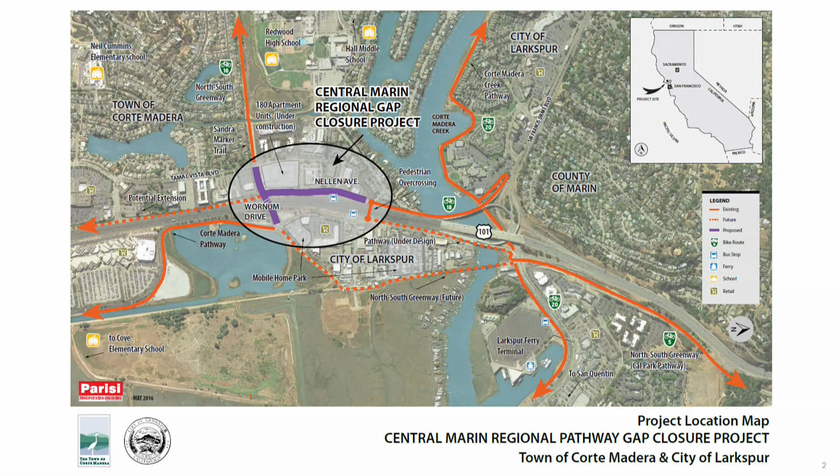Here, this is my mouse. All right. We gotta get this straightened out. We go through this every meeting. It's like this is great.

As RJ mentioned, we are under the PAED, which is Project Approval and Environmental Documentation stage. And under that, we have several subtasks that we're going to be completing. We have a field review, including topographical surveying and mapping, really understanding the area. Data collection, including counts and other elements. We'll be mapping the area. We'll be conducting a robust traffic analysis because we are going to be looking at potentially opening up Nellen to access off of Fifer. We'll be looking at different alternatives, and we're going to chat about that tonight because there's different ways to provide a bikeway or a pathway along Nellen Avenue.

Of course, there'll be some really robust outreach, not just with this group, but also stakeholders that live and reside and have business along the corridor. We'll be refining the design to get to an improved concept. In concert with all that work, we do need to complete some environmental work to be in compliance with the California Environmental Quality Act. The biggest issues we believe will be looking at transportation impacts, particularly if part of Nellen is open to inbound access off of Fifer. There are some trees along Nellen that we could impact, that we'll take a look at, and there's some cultural resources as well.

Well, everyone's welcome to pizza. There's enough here for everybody, so don't be shy. Thank you, Kirby. The smell will get to you, man. You got it. Like otherwise, you're just gonna drool.

And there's a few feet between the fence and the curb. And then the street itself has 8-foot parking areas on both sides and 10-foot travel lanes. So the street is thin, but it is a two-way street. And then there's also a narrow sidewalk on the west side. So something has to give if we're going to put a pathway in here or a bikeway. And we'll show you some of the options that we're thinking about.

To the left here, that's called a cross-section, and that's exactly how it looks today. You can see the 45-foot right-of-way, the roadway, the Caltrans right-of-way to the east to the left, and then the right-of-way line to the west, and the 4.5-foot sidewalk. As part of the grant application, this option A was submitted. It's not in stone, but this is what was part of the grant application. So we're showing that as option A tonight.

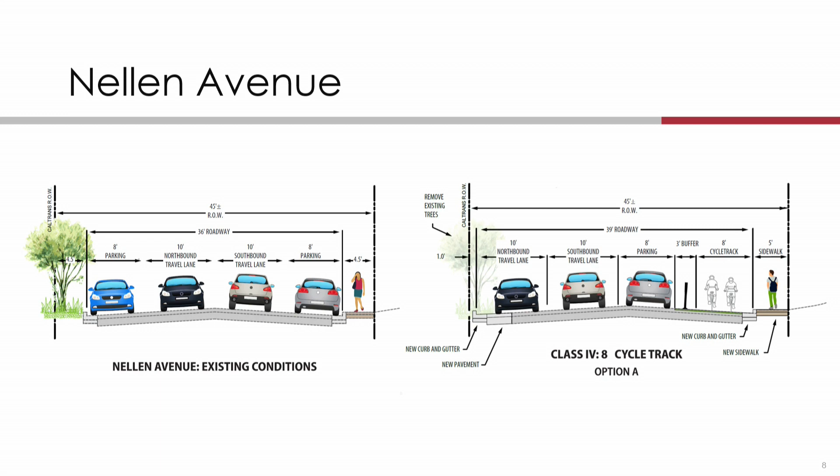So that was what was included in the grant application. We've sketched up a couple additional options that probably should be considered, and folks will probably be very interested in the pros and cons of those as well. So the left side is exactly what I just showed you, existing conditions on top, and on the bottom was that option A, which is the cycle track.

We sketched up a potential option B, which instead of a cycle track would be a Class 1 pathway, which would be a multi-use pathway for pedestrians and cyclists. Keep in mind that Wornum is a multi-use pathway. And the crossing over the Corte Madera Creek is a skinny multi-use pathway. So this is what we're showing here.

This option, interestingly enough, the one that we're showing as option B, could retain the curb against the Caltrans side, so that wouldn't need to be moved under this schematic. You can see there's a tree still there. And then provide two 10-foot traffic lanes, 8-foot parking lane, and then a Class 1 pathway.

And then we're also showing an option C, which also would have two-way traffic, parking just on the west side, but would move the curb on the Caltrans side or the east side to provide a more gracious pathway with better buffer and so on and so forth, and not have to rely on the west side properties to use for a shoulder. These are just some of the ideas.

Parking could flip-flop to the other side. We may hear that folks want to perhaps look at a one-way for traffic, just in one direction only, especially if access is opened at Fifer, perhaps just a southbound Nellen Avenue. So all this will be considered. We'd love to hear some input tonight. These are just some starting points.

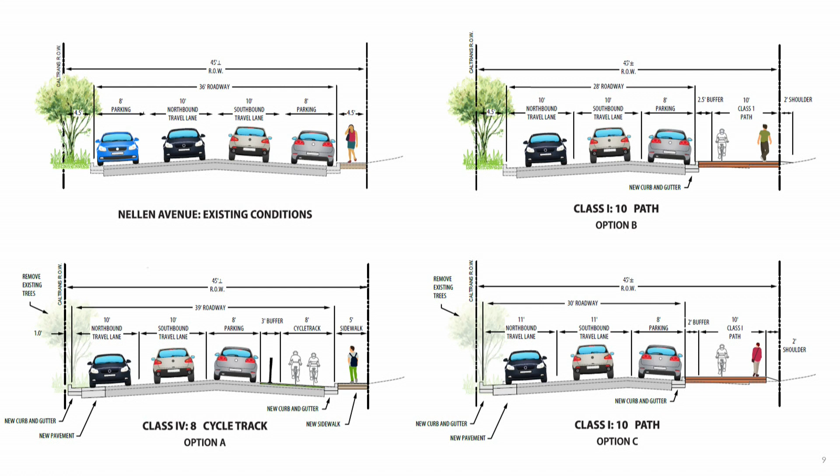I mentioned the idea of providing vehicular access to Nellen. I wasn't here in 1987. I think, who was? Who remembers this?

Yeah, okay. So, before Wornum, that alignment used to be the train, and you can see how the roads were configured with Nellen sweeping underneath the north side undercrossing there under 101, a few decades ago. And Nellen used to be a two-way access street. That's how you got to the other side of the highway.

So what we're looking at under this study would be potentially opening up Nellen just to traffic going eastbound on Fifer and then turning right onto Nellen. Okay, does that make sense? But not traffic coming the other direction getting onto Nellen, because the median would still stay there.

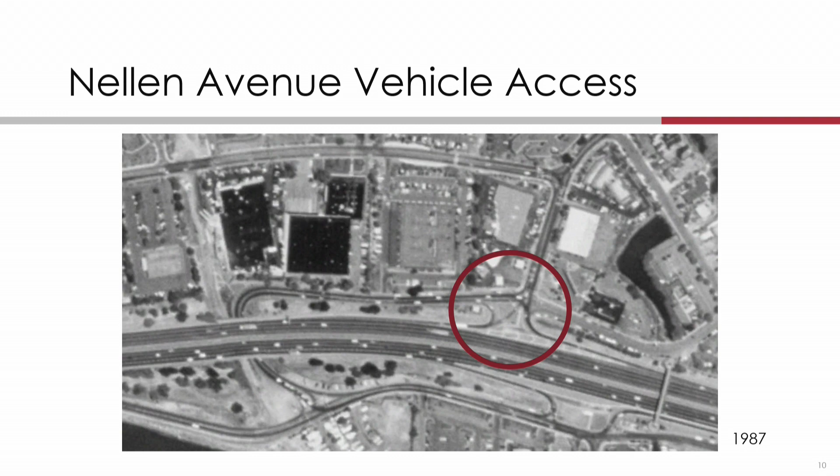And some of the things we're going to be looking at there is, well, gee, okay, if you do that, could that help Tamal Vista? Because we know that the left turns from Tamal Vista onto Wornum are huge at times, causing lots of delay. And we're going to model with traffic volumes and traffic modeling and simulations to figure out how much time would that save, how much congestion would that reduce, and what could be some of the other effects as shown here.

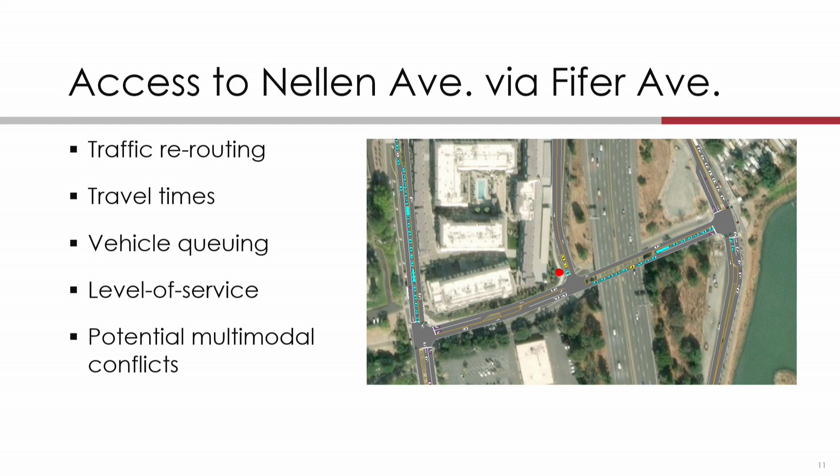So we've already started to develop some of the tools to really understand the potential benefits, as well as maybe some drawbacks associated with that, because that would mean, of course, more traffic on Nellen. At the same time, we're trying to get a pathway or a bikeway along Nellen. I got to get my keyboard out there further.

Most likely, if we're successful, we're going to bring more users across here, and we want to make it a safer crossing. So we're going to be looking at things such as the potential use of devices like rectangular rapid flashing beacons or a staggered crosswalk where you offset it. But we got to be very cognizant of what this could mean for traffic, particularly traffic getting off of 101 and queuing back. We don't want to cause any additional impacts. So that's going to be part of this project as well.

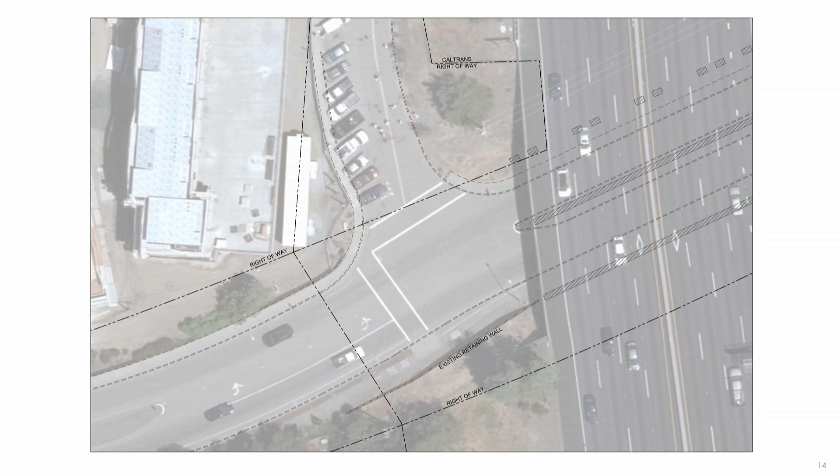As part of the grant application, a traffic signal was mentioned, but we also want to look potentially at a roundabout. We know that a roundabout can fit in this location. We've started to test it, and it could have some benefits. So we've actually started doing some layout work, understanding the right-of-way, some of the obstacles. You can see we started even sketching out some ideas.

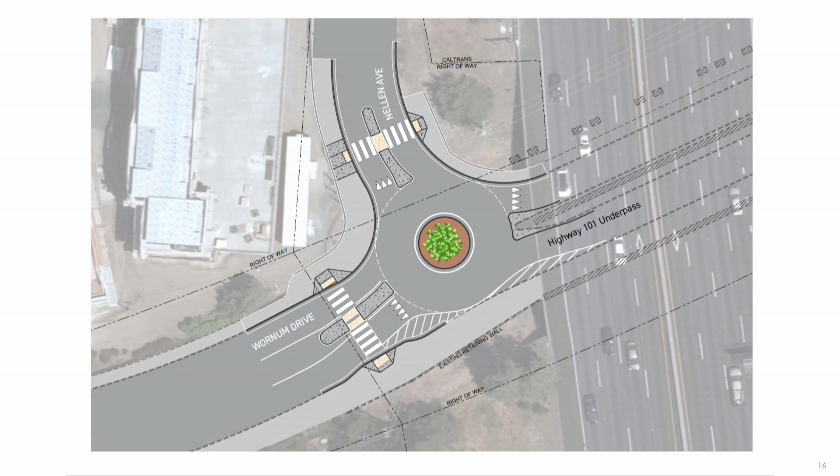Of course, if we design something like this, we need to make sure it works for fire apparatus and won't cause more congestion. So there's some really neat opportunities, and we'll be looking at different types of traffic controls and different ideas for crossing the street at this location.

As I mentioned, we do need to do environmental assessment, working with your planning department. I do believe that the biggest issues that we're going to need to address will be the traffic, particularly if Nellen is open at Fifer. What's this mean for safety and for traffic volumes and traffic along Nellen itself? If we move the curb along Nellen by Caltrans shown here, and we move it further to the east a few feet, there's a different variety of trees and different stages of health that we would affect, and those will need to be studied as well as part of the project.

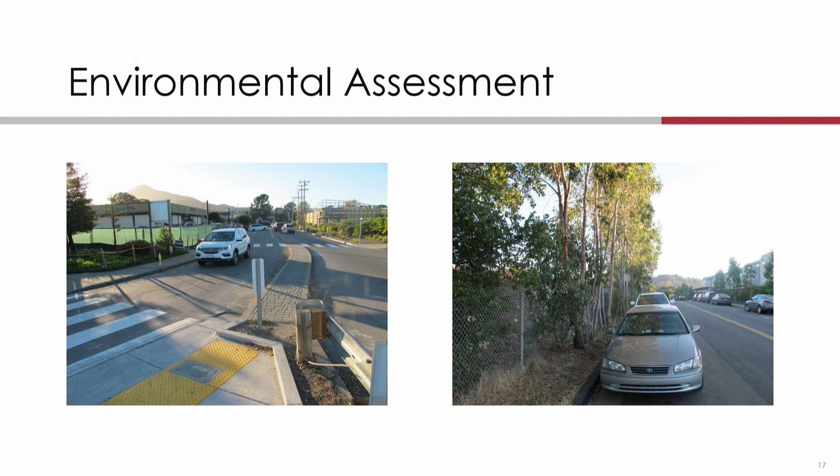After we get through the PAED, again, the project approval and environmental documentation, and it has that name on purpose because it's a Caltrans process that we actually need to follow. This is state funding. Once we get through that point, then we get into what's going to hopefully be a lot easier because we'll have done all the outreach, we'll have a preferred design, then we'll start getting into some of the final technical studies. Engineers will start doing a lot of the work with CAD to actually develop plans, specifications, real tight cost estimates. We'll know a lot more about utilities. We'll work with the state and the town on getting encroachment permits and right-of-way certifications, and finally develop some final plans.

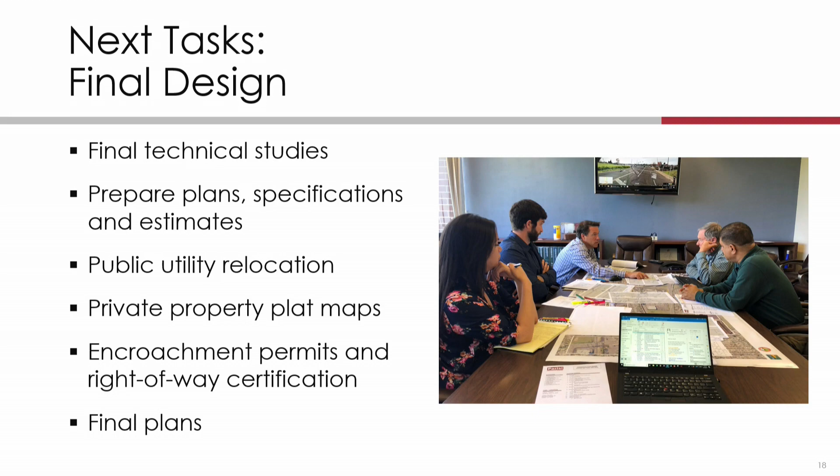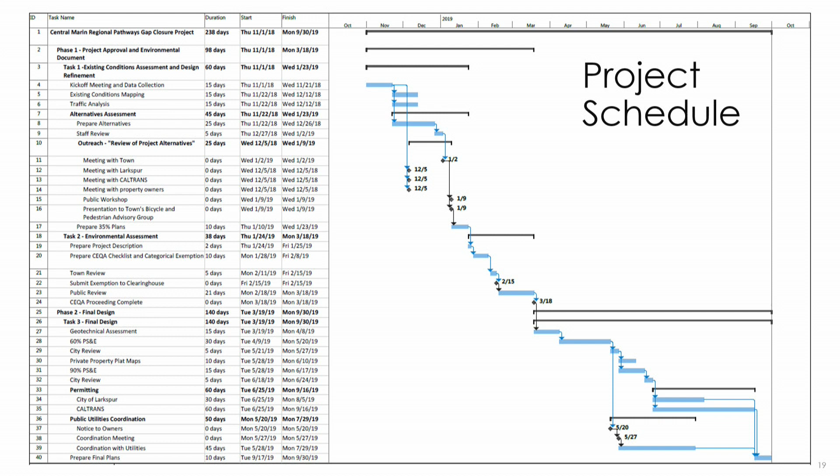This is a very detailed schedule. Generally, what we're showing is that our goal is by the end of next summer to have those final plans in place. So we have a lot of work ahead of us, and we're looking forward to it. And with that, I'll stop here, and happy to try to answer any questions you may have. Love to hear any feedback you also have about some ideas and things we should be taking into account.

David, thank you very much. So just a quick review on process. What we'll do first is we will take questions from the BPAC members, not comments or input. So just questions for clarification, then we're going to open it up to the public, and we'll hear the public's input. And then after we've heard the public input, we can provide our input and our feedback. Does that work for everybody? Great, okay. Any questions from BPAC members about the presentation?

Lee, no? Down here? Or? I have a question, but I'll wait. I want to formulate it. So I'm thinking through something. Okay. Anybody else? No? Just one.

Yeah. Were there any bike counts or vehicle counts yet as part of this, or is that a process that's to come? We actually have kicked that off and done some vehicle, bike, and pedestrian counts during weekday peak periods, because we're going to use that for modeling purposes, at 4 or 5 intersections, so we can understand the ramifications of potentially opening up Nellen at Fifer.

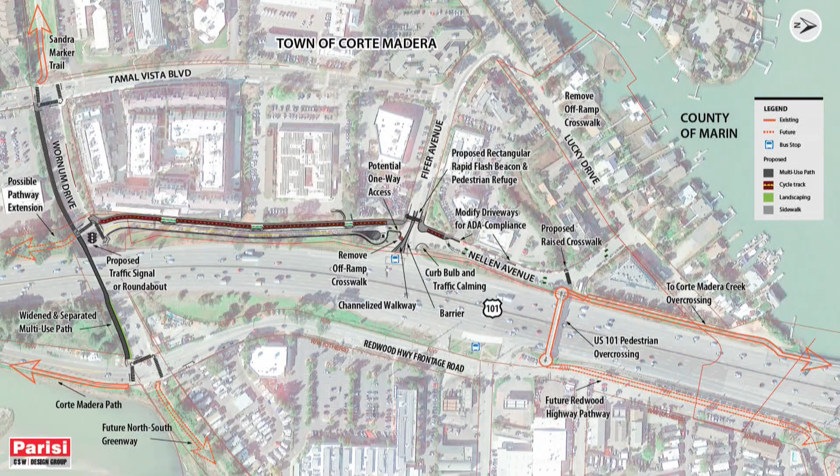Then I would hope that the town would make it a priority to address the Fifer crossing in maybe a more elaborate fashion in the future. At least acknowledge there may still be a need. Right. We can improve it, but there may still be need. But I'm glad that we are talking about substantial improvement as part of this project, right? Am I interpreting? Yes. Absolutely. We're going to do all we can within the space we have. We think there's some really good opportunities for providing a much safer crossing than there is today.

Is it possible to zoom in a little bit on that one as well? The median right there at the bottom is super skinny. There's very little room for anybody to feel safe when they're crossing the street. But there's also shoulders on both sides of Fifer now, little shoulders about 4 feet wide, which means we're going to look at moving the lanes over a little bit and widening that median out.

to provide an area that's much more comfortable, perhaps even a median wide enough that we can cross people from the north side to the median, and then along the median, they would travel westerly and then cross again, providing eye-to-eye contact with motorists, and one crossing at a time, which may also provide some benefits with the traffic control that we're thinking about, beacons and whatnot, and trying to get the crosswalk a little further away from the ramps. So there's many things we're going to be looking at.

I think there's a great opportunity, since this Jakovitz site is being developed now, that we possibly could move the ramp further to the west, where there used to be a driveway. It's not going to be there anymore, so it gives us the opportunity to relocate the ramp. We'll be coming back with some very detailed ideas for this location. This is crazy because 50 feet away you have another crosswalk, to the bus stop. So for motorists, there's just a lot going on. We want to make it simpler for all users.

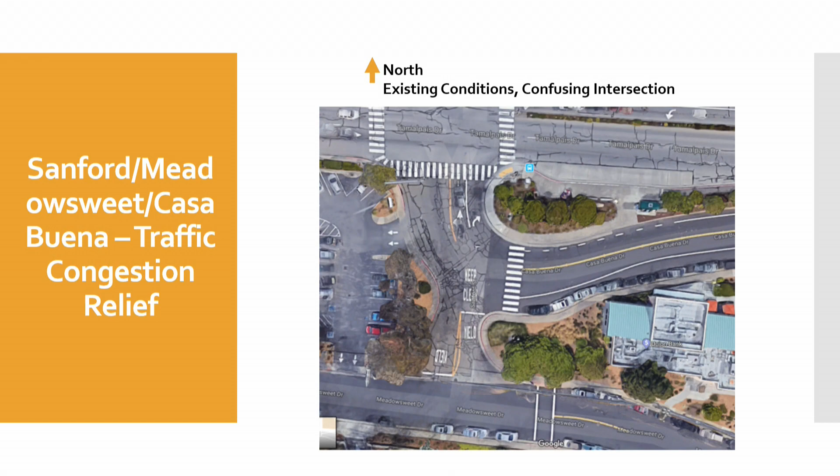What we're proposing is to eliminate the northbound Sanford movement from Meadowsweet over to Casa Buena for vehicles and allow a little bike slip for cyclists. We're going to do a safer crossing for peds at a couple locations across Meadowsweet. It's a shorter cross distance there. And then we're also moving the Casa Buena crosswalk that's in the intersection now eastward over to the bus shelter, where it's going to be pulled out of the busy intersection with a little bit of a bulb out as well.

And then the only thing I'll add to what Jared's talking about is a couple issues that are near and dear to me because I use this intersection quite regularly. You can see we're planning on some skip striping here for bicyclists. This would be green, and so when you're transferring out of the Class 2, it signals to both bicyclists and drivers that this is a place where cyclists and drivers are in conflict with each other.

As cyclists come, they'll have their own painted bike lane here. Sanford in the southbound direction is converting from yield to stop. I can't tell you how many times I've come up and down Meadowsweet, either on my bike or driving, and had people treat this yield like it was a green light. So I believe the safety improvement we're going to get here is important with this new stop control.

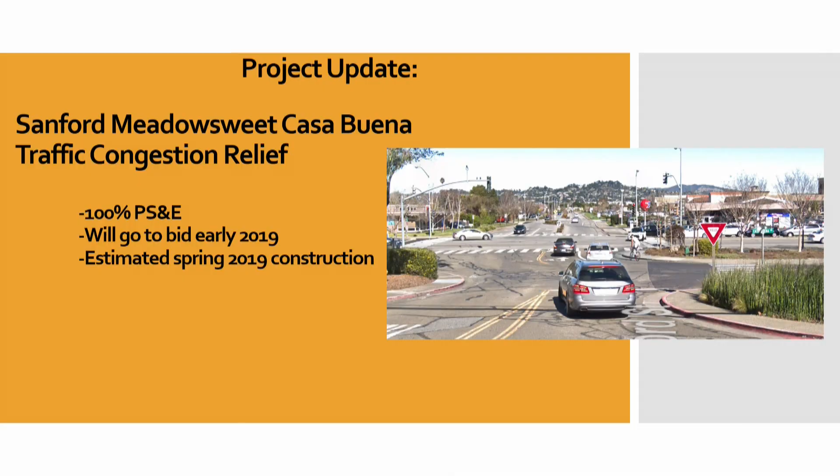Any questions? For the stop control project on Cano, Peter, is that going to be in both directions or all three directions? It's a T intersection. I'll work with David on this. I think the current design is on Meadowsweet as you approach Cano. We would like the Meadowsweet traffic to stop. We don't really have high volumes on Cano. Most of the traffic goes up Meadowsweet. So it would just be a one-way stop at a three-way intersection. Currently, it's a yield, and people don't.

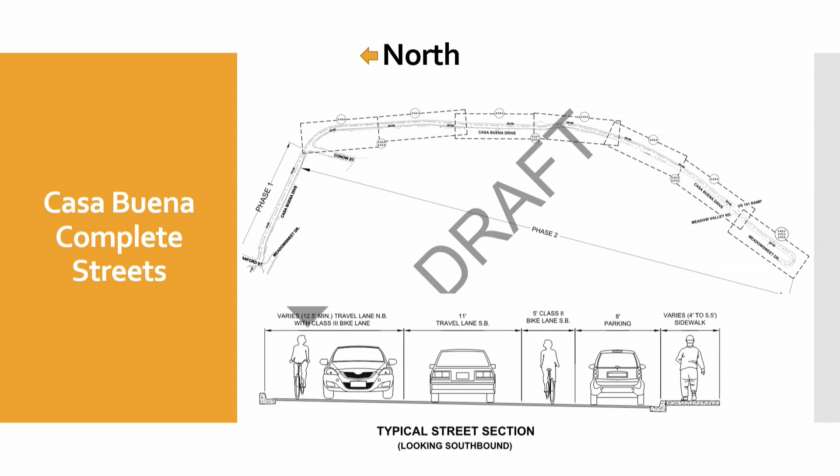Okay, thank you. Next update is the steps, lanes, and paths fire evacuation program. This was discussed at our August meeting with Mill Valley and their plans and how they went about it. We've had some discussions with our NRG coordinator, Lori Rice, who takes care of us in Larkspur, and we've been looking at some GIS coordination. We've spent about 40 hours on that, and now we've transferred it over to Marin Map to take the lead. That's basically digitizing our steps, lanes, and paths.

We're also looking into categorizing and getting a top 5 to focus on for good infrastructure repair and rebuilding. And just a helpful update: our maintenance crews do attend to these and do some brush clearing, leaf and debris removal. I just got confirmation this afternoon that we got the crew up there this week. I think they do it a few times a year, and they just completed the pre-winter version. So that's good news.

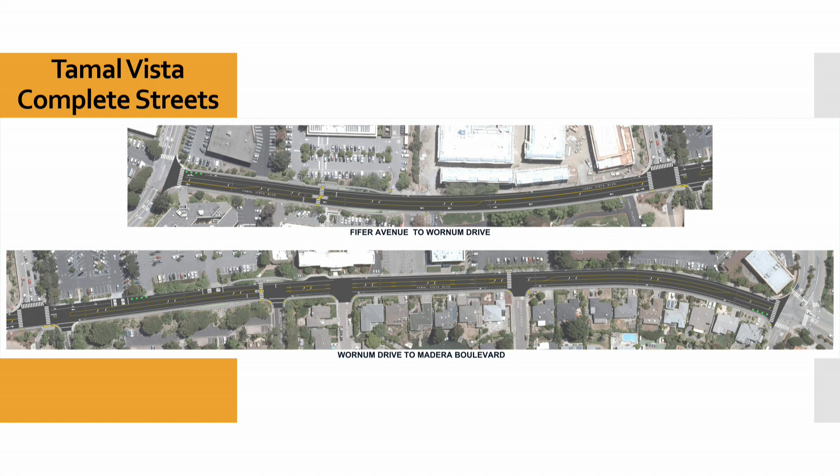I often have to go around the corner, essentially use Council Crest if I want to go northbound, because I can't get out of my driveway and go northbound directly. I have to go southbound and go around. And at Council Crest and Tamal Vista, there are often cars parked very close to the intersection, and the sight lines are poor. So if we had red curb on Council Crest, as you've done in Conal, for sightline purposes, that'd be helpful.

Yeah, we can look into that.

I know it's not going to make people happy, but... I'll be sure to tell them it was your idea. They know where to find me. Know where you live. Neighbor.

So just quickly touching on the other 2 aspects here, the sanitary sewer system, I'll go into a little bit more explanation here. Currently, we've televised the sewer lines. We're assessing the condition of them, and this is basically going to dictate how much effect we're going to have at the complete streets level. If we have minor issues or improvements to do to the sanitary sewer system, then potentially we could roll this into the complete streets project all as one and deliver it all together. If we have major sanitary district mainline repairs to do, that's probably going to be its own project.

And the specific time frame we're working at are summer times for work along Tamal Vista due to the Redwood High School traffic right through there. So we don't want to be doing a lot of major road work outside of the summer, the closed school time. So summer 2019, summer 2020 is kind of where we're looking for those 2.

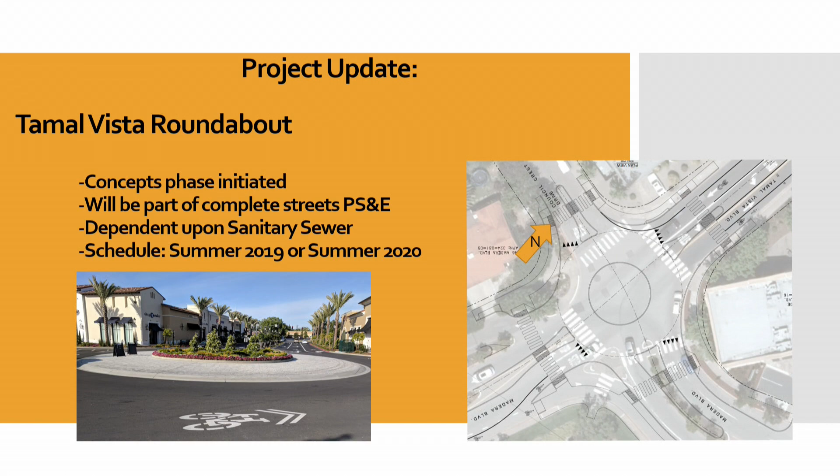And then the only thing I'll add to that, Jared, is, I mentioned earlier that right-of-way is the key constraint for roundabouts. And so the next time you go through this intersection, no matter what your mode, just think about how wide the intersection is. So this is an ideal location in town where in the peak hour we do have some queuing. Stop-controlled intersections don't handle a lot of vehicular traffic the way that a roundabout can.

And so this, in my opinion, is an ideal location for introducing the town of Corte Madera to the beauty and the functionality of a roundabout. It's kind of a gateway to the town. It could be a gateway to future traffic control device upgrades. But since we're in BPAC, I'll just go through some of the maneuvers real quick of how it works.

So let's say you're a young gentleman here with skinny tires like Jared might be. He will use the Class 2 bike lane, look over his left shoulder, and as it's clear, he will take the lane and use the middle of the lane to go in any direction he wants. I doubt he'll make a U-turn, but he could. Most likely he'll go straight and use the lane. If he's with his 6-year-old daughter and he doesn't want to throw her out there, he'll say, Quinn, let's go ahead and get on the sidewalk here, come with Dad, and let's cross over here.

And then when we get around the corner, a little slower through the intersection, but then we can go back into the Class 2 here. So that's the way it works for different users in different age groups. And there'll be ramps to be able to? Absolutely, yeah, there'll be ramps.